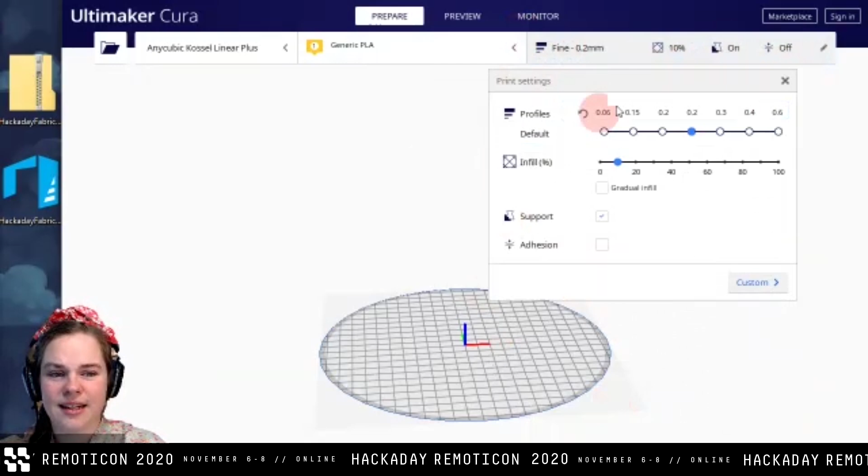In Cura, there's this wonderful search bar at the top here under print settings, which if you don't have this open, if you click on this bit where it says your layer height and the infill percentage and all that sort of stuff, it will bring up your print settings. And if it looks kind of abbreviated like this, go into custom, and that will give you the full list of all the Cura settings, so you can change anything. It's kind of overpowered, there's a lot of settings.

So I like using this search bar to find any of the settings that I need because yes, it's a very long list. So the first thing we want to change is layer height, and we want to change that to 0.2 millimeters, just so this print doesn't take too long, and also so it's nice and squishy. If we were going up to 0.3, it might start to get a little bit loose and might not squish through to the layers. So 0.2 is the goer.

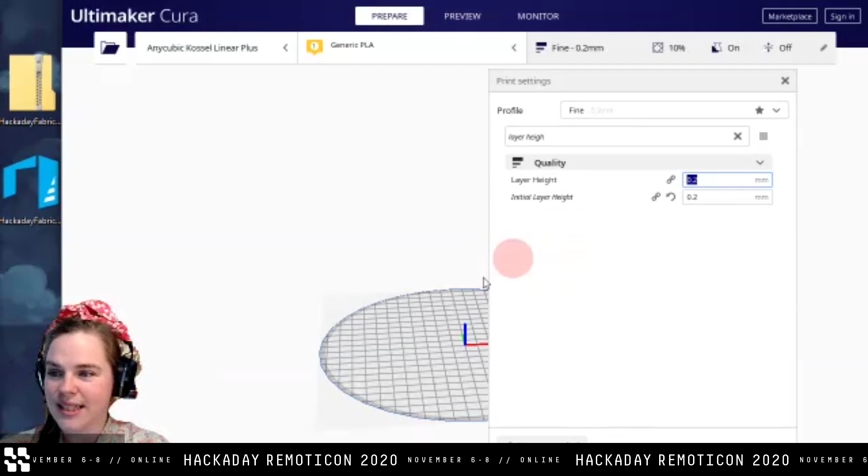Cool, Slic3r, sorry. I don't have the instructions for Slic3r, but I assume there's a way to add a pause in the slicer, so try as much as you can to follow along, we'll see how we go. Oh, you've only ever used it in Repetier, there you go. It should work with other filaments.

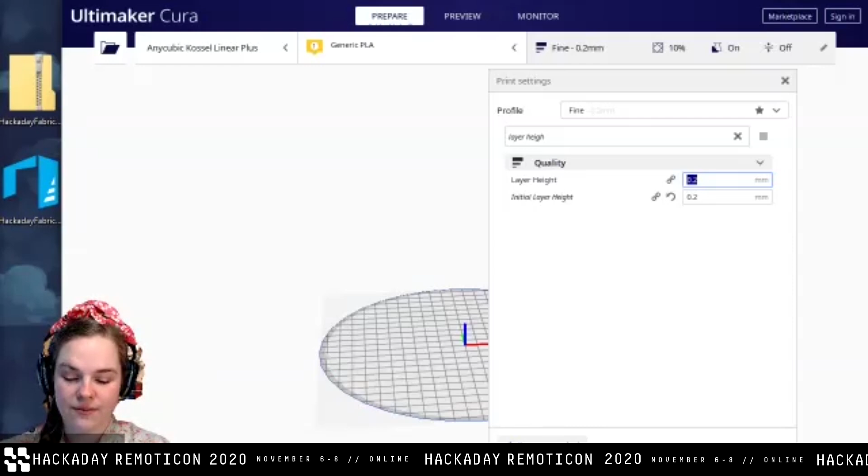I'm using PLA today because it prints at a relatively low temperature. PETG is a little higher, but you should still be fine. I think once you start getting into ABS territory, I would be a little bit worried about some of the fabrics melting on the nozzle, but please give it a go and see if it works. I just thought I'd go PLA because most people have it, it's pretty easy to print and all that jazz.

Cool, there you go. Ah, look, we're looking out for each other. Thank you for helping each other in the chat.

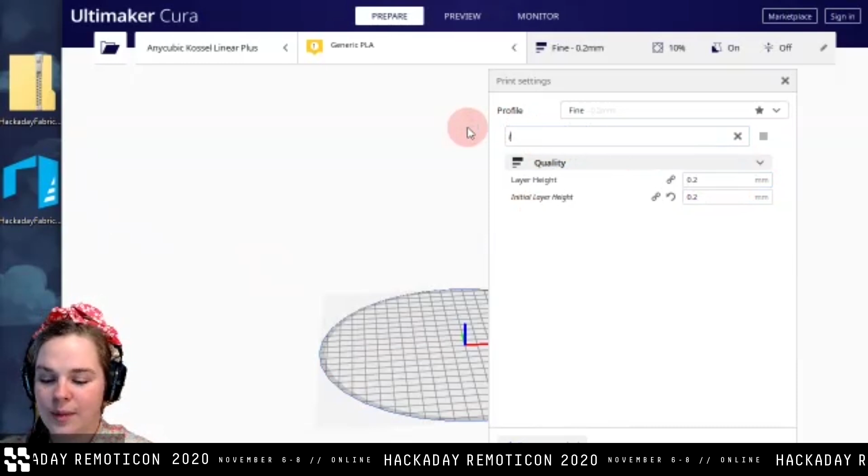So, 0.2 millimeter layers. If you type in 'bottom', there will be a setting called bottom layers, and we want to make that 5. That's purely because we are 3D printing 3 layers, then putting our fabric in, and putting 2 more layers on top, so it sandwiches the fabric in. If we left that at 3 layers, which is the default, it would just put the fabric in and it would only be held by the edges of our model, like the walls of our 3D prints, which isn't as strong as properly sandwiching it between full layers. So make it 5 - 3 layers, our fabric, then 2 more layers on top to really squish it in there.

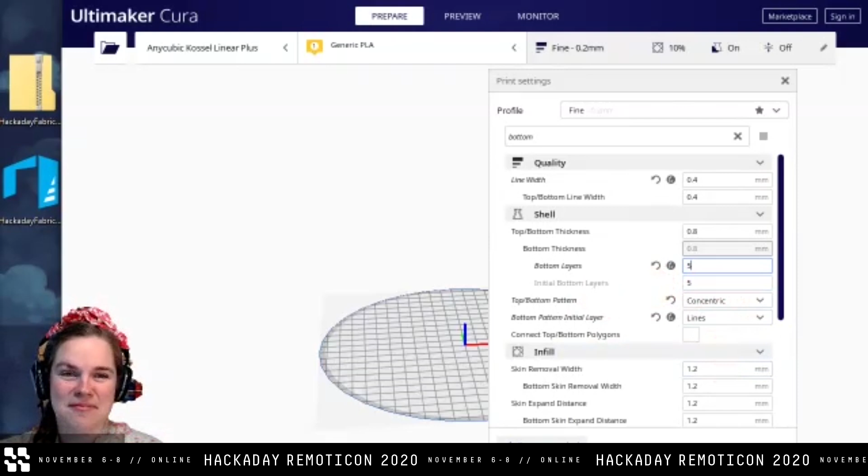So bottom layer is 5. You can print with or without bed heat, it doesn't matter too much. I've had success both ways, so it doesn't really matter in this instance.

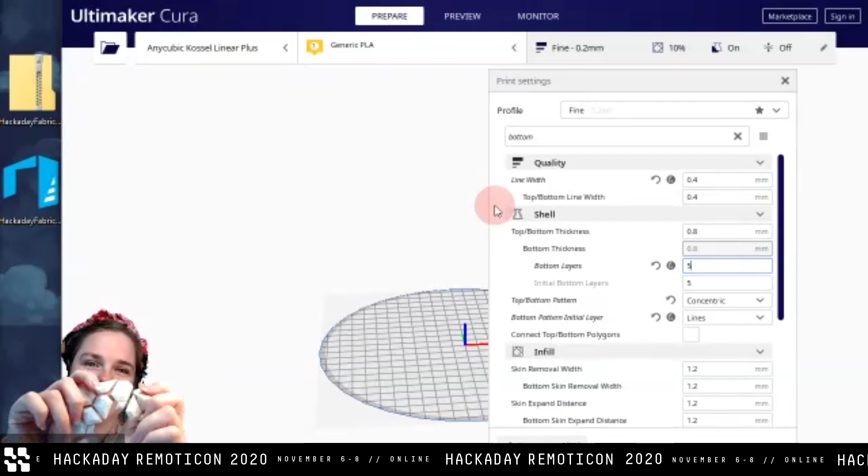One note - when printing quite small patterns like these, if you use concentric infill in the top layer, it can mar the surface. I have an example here - the nozzle moves around in tiny little circles and gets a bit scratchy right in the middle. So you might want to set it to lines or something instead of concentric if your top fill pattern is concentric. You might want to change it to lines or zigzag, just something that doesn't keep the nozzle moving in the same area for a long time.

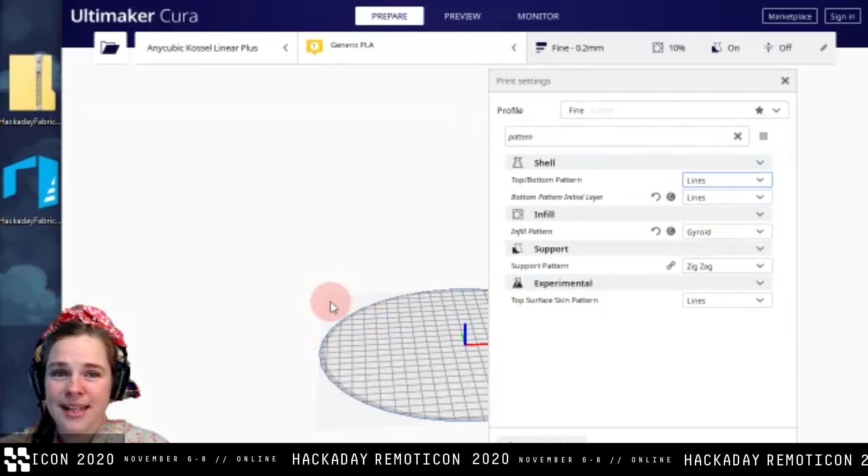How's everyone doing? Anyone got any questions so far? Looking all right? I'm getting some nods. Cool, feel free to interrupt me. I know I talk quite quickly, but feel free to interrupt and I'll keep trying to look at the chat.

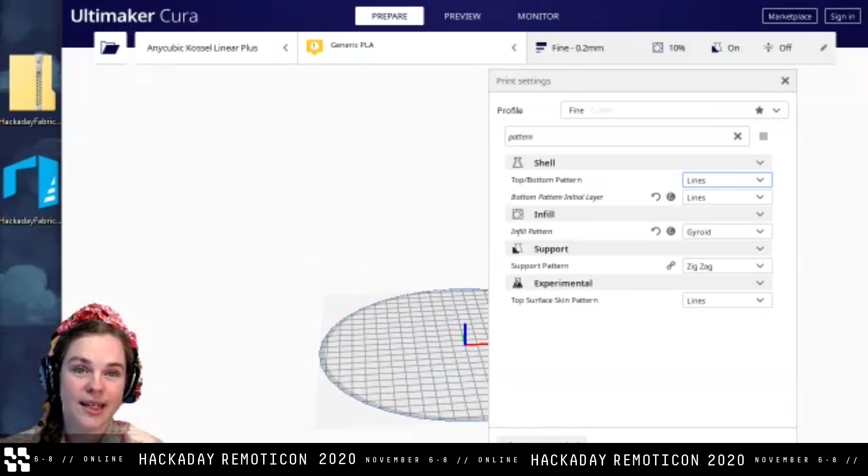So that's the bulk of the slicing done, but we want to add our pause as well. You can, if you're just doing a quickie print, hit pause on your machine manually, but we can actually pause it at a very specific time, which makes it a bit easier.

So in Cura, the way to do that - I'll jump back to my presentation - is to add a post-processing script. I have a little GIF here of it going through and ticking along. I'll demo it, and then I'll leave this GIF running so you can do the same thing.

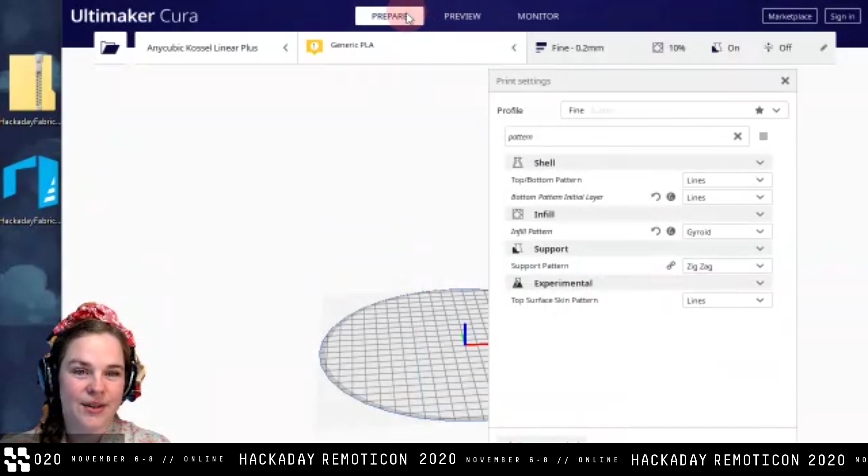I will switch back to the actual software. Here we go, so you can go into... oh my gosh, come on, prepare. Sorry, no, it's me. So go into Extensions up in the top. Oh, I'm a little bit chopped off, I'll move this down a little. There we go - Extensions, then Post Processing, then Modify G-Code.

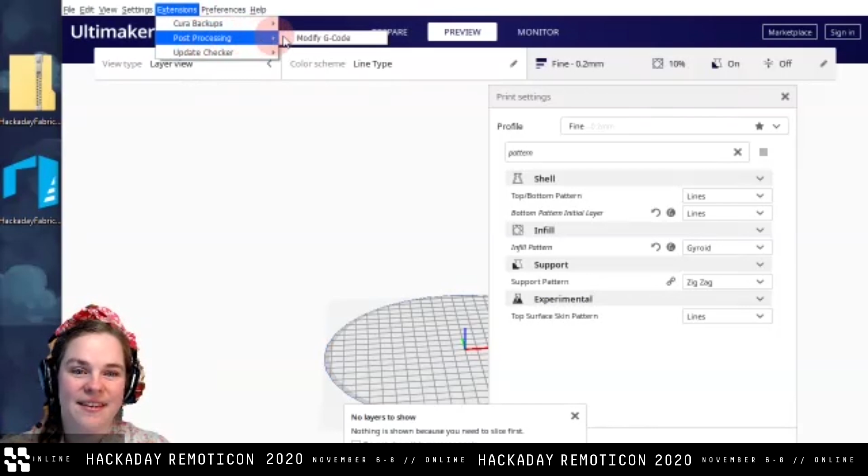You can make the initial layer height whatever you normally use. I normally make it the same as the rest of the layer heights, though sometimes people like setting it smaller so you get a bit of squish to adhere to the bed. You should be fine with whatever you use.

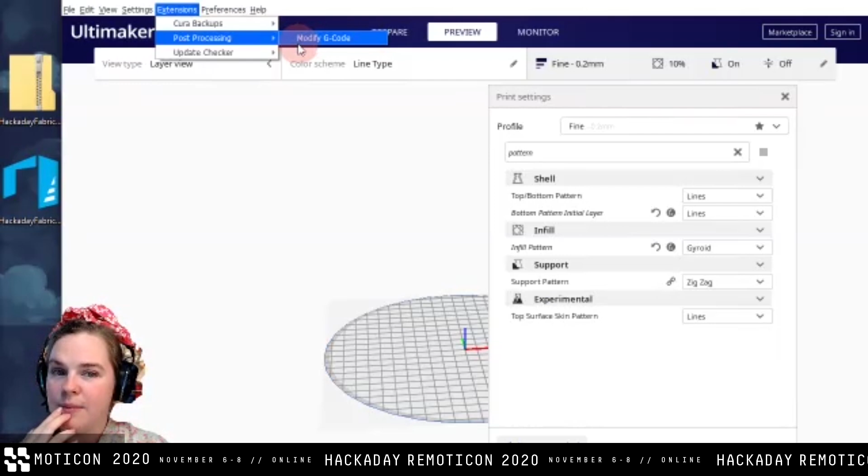So David, is that in the Modify G-Code? You don't have layers, only millimeters? Is that with the post-processing you're talking about? I'm not sure - okay, cool, we'll get back to that one.

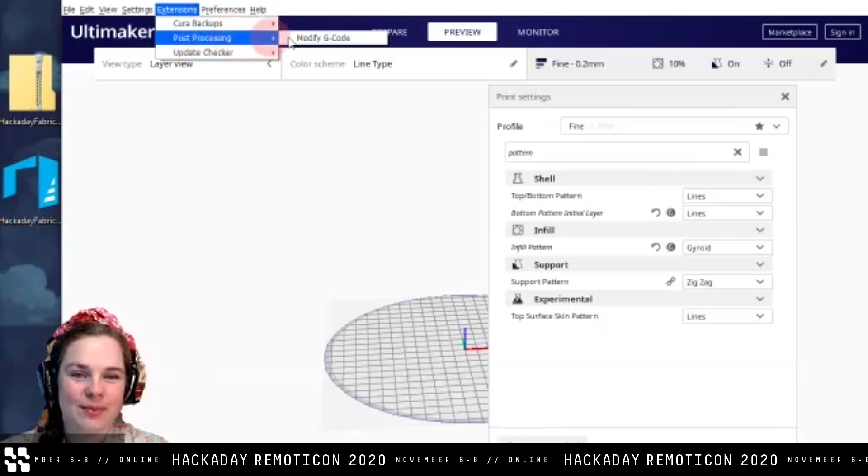So yes, we are adding the pause by going Extensions, Post Processing, Modify G-Code, and it will open up a little window like this, probably empty. You'll want to add a script and go 'pause at height'. There's a few different pause at heights depending on what firmware your machine is running. If you're running something like a Creality machine, like Ender 3, CR10, or Prusa MK3 or MK2 or any of those, you're probably running Marlin, so you'll probably want the one that just says 'pause at height'.

There are other pauses for other machines running RepRap firmware, like the Duet or others. So use the one that works for you, but probably this 'pause at height' one will be the one, because this one is for Marlin, even though it doesn't quite say that, but it is.

In this menu, you want to change a couple of things. It'll say pause at height, and the first option will be pause at, with a dropdown where we can change it to height or layer number. We want to change it to layer number because we want to pause at layer 3. So change that first dropdown from height to layer number, and then the next field below it is pause layer, and change that to 3.

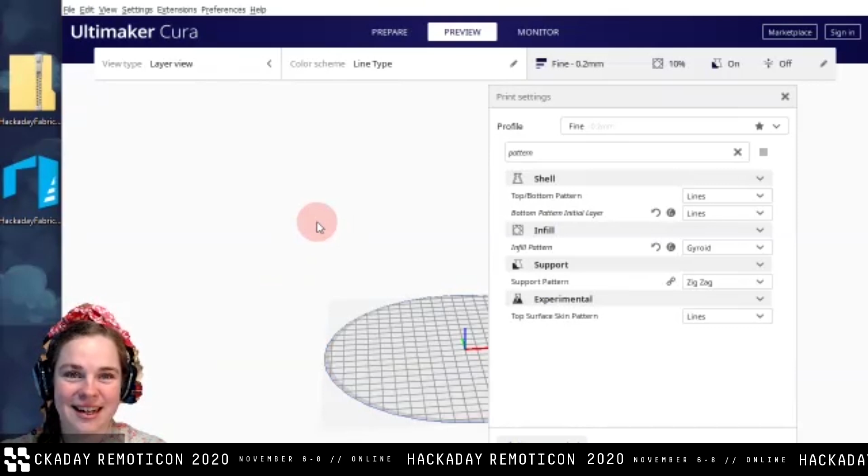Other than that, that should be fine. Once you've got that, just hit close, which does save it. There's no save button, but it's kind of saving it as it goes. Then you should be hunky-dory, able to just hit save on your G-code.

I'll just play this GIF in the background for anyone who didn't follow along, since it talks through the steps as well. In the meantime, I'm going to export this G-code. Oh, helps if I actually put the model on a bed, which I hadn't done before now. So yes, I'm going to slice it now and send it to my printer using Octoprint.

Has anyone not put the pause in? Does anyone need another go of that?

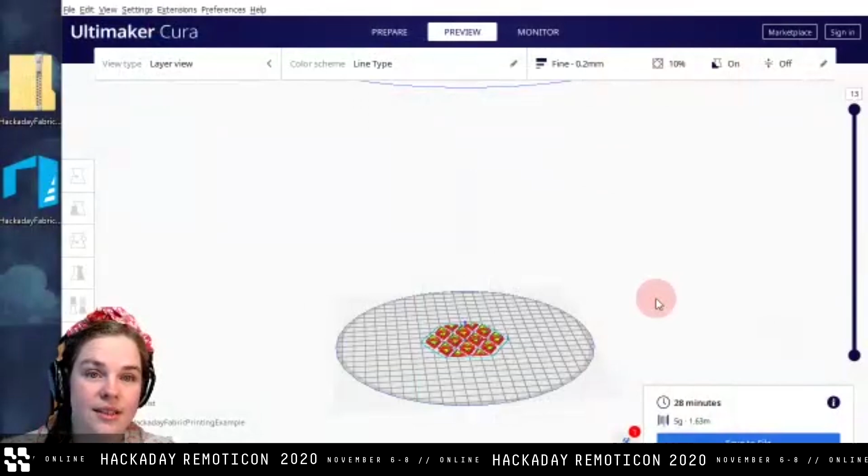The script will be active next print, so yes, you do need to remember to disable it. Thankfully in Cura now, it didn't used to do this, but now it has this little alert when you're slicing saying you've got a post-processing script on, because lots of people did what I did and forgot about it and left it on, then you just had to hit go again on your next print.

Okay, you can pause manually, that should be fine. Just try and pause at layer 3-ish or 2.5 or whatever. As long as it's around 3, it should be good.

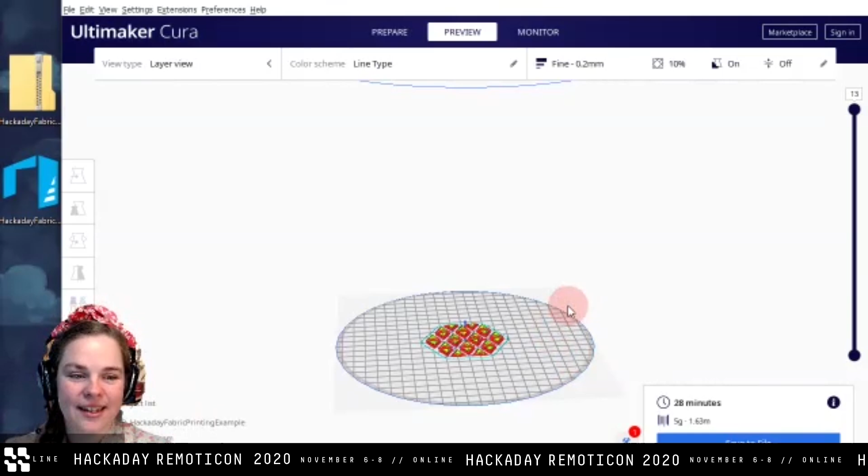Cool, yes, so you do have to remember to disable it for your next print. Don't do this now, but when you don't want to print on fabric, just jump back into settings, extensions, post-processing, modify G-code, and hit that little X button to remove it. But don't do that now, do that when you want to print something not on fabric. But yeah, you will have to disable it again.

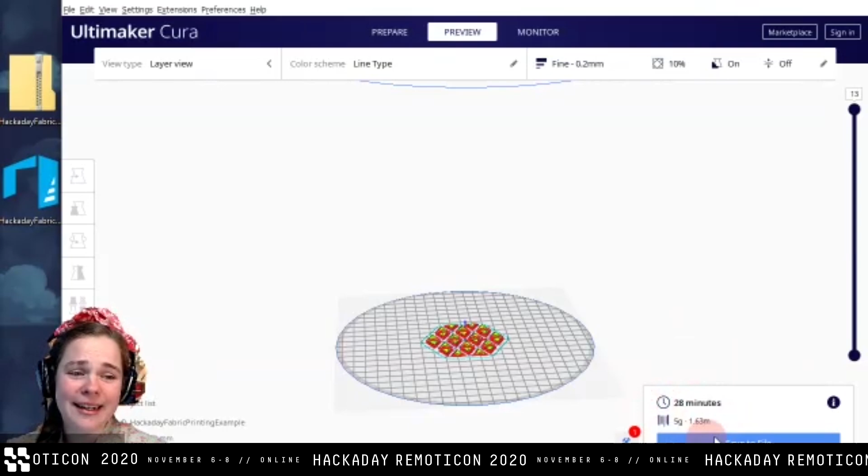Cool, so hopefully your print time will be somewhere around half an hour. If it's not, maybe just speed up your print for the sake of this. It might not look super pretty, but hopefully it will finish by the end of our session. I do really want to give you a chance to be able to take it off the bed and everything.

So yeah, save it to file, and we will pop it in through Octoprint for me. I've got it up here. If you haven't used Octoprint before, really cool software, it allows you to print remotely using your 3D printer, which is very, very fun.

Alrighty, I'm going to hit print on that. It's a little bit noisy, my machine. I've tried to find a quieter place for it, but there's nowhere in the house because I share my house with people, so a little bit tricky.

So we're just going to have to deal with the noise today. The nozzle does cool down during the pause, but it should heat back up again before it starts printing again. Yes, Octoprint, amazing.

Gina is a legend. Sorry, I'm just reading the comments.

Don't put the fabric down yet. We're going to print to layer 3, that's what our pause was all about, that's why we inserted that pause. So we're going to print 3 layers, then the machine's going to pause for us. Then we're going to put our fabric in and tape it all down, and then we're going to continue our print.

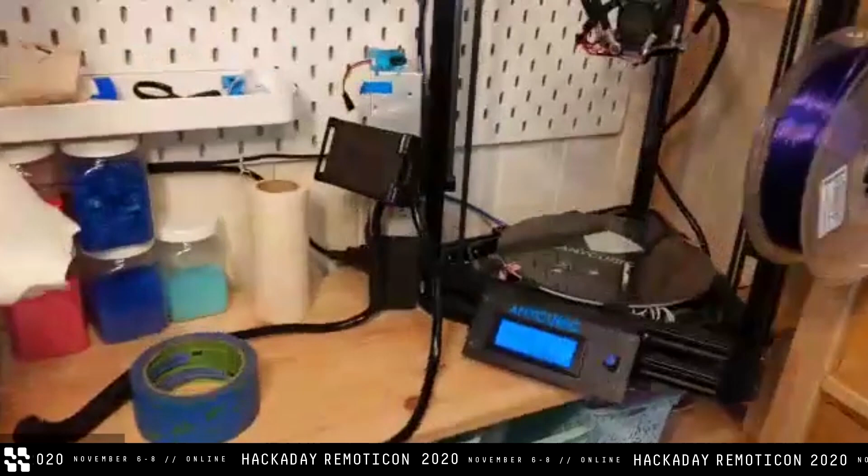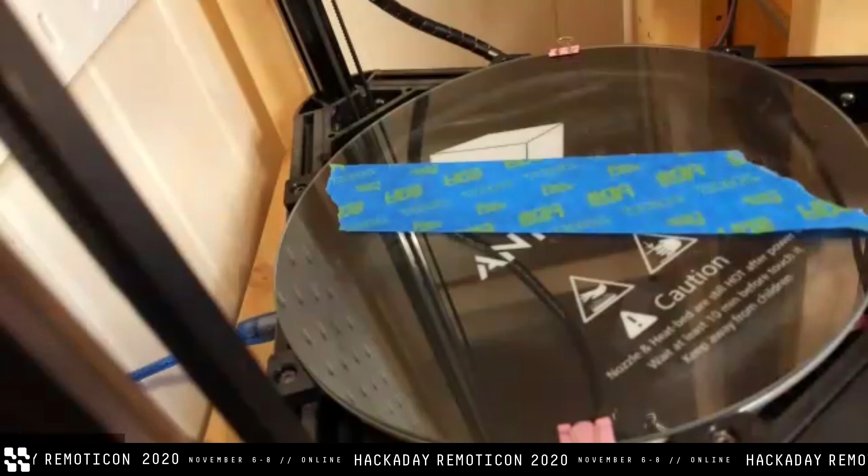I'm just going to pop you over here at my printer. And this is my bed. I'm going to be putting down a bit of paper tape. Sorry about that, I meant to say it sooner. But yes, a little bit of paper tape to print on top of. It just helps remove the print so that we have something we can pull the print up from. You just want to try and line them up with each other pretty closely.

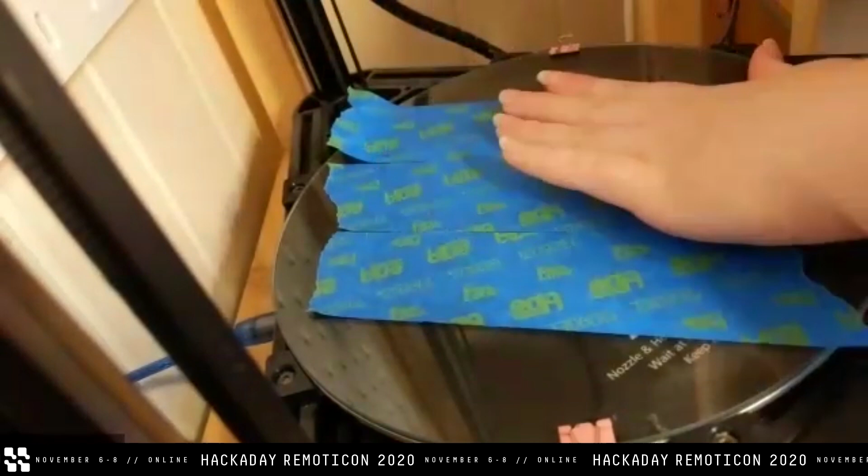Cool, so we are just warming up. And I'll put in my little leveling doodad, because if you're putting paper down, you'll also want to re-level because otherwise it might be a bit squished. You might be all right, but I'm going to level just to be safe.

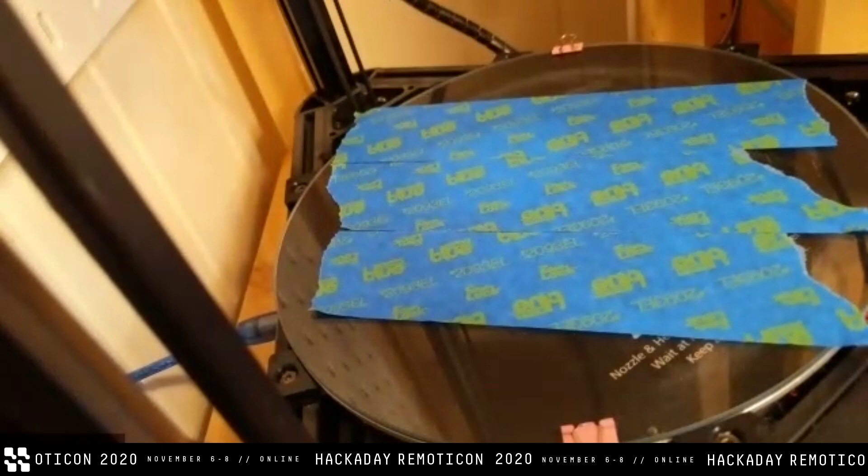And it's going to do that. It'll be a little bit noisy. It's particularly noisy when it levels. It's not quite as noisy when it's printing. But I'll step away a little because it's kind of noisy.

28 minutes to print. Good. That's what we want, David.

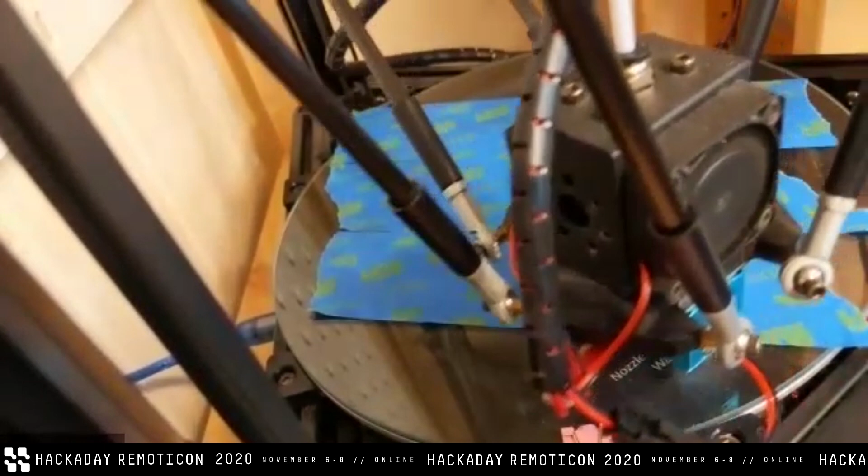Yeah, this is my little craft room. It's my happy place, I think I can. Yeah, this is my room. So that's my printer that we're printing on right now, and this is where I'm sitting normally. Got my window.

It doesn't have to be unheated, but you can make it unheated. I used to print it unheated all the time, but the paper tape is really just to make it easier to remove. So we'll be lifting the paper tape and hopefully the print will come off with the tape. It just makes it easier so we're not jamming a paint scraper in under there because that might tear the fabric as we're poking it.

Cool, flick back to this camera. This will be done pretty soon.

Oh yes, that's my new painting. Thank you, Jeff. I just started learning to paint, it's very fun. Where are we? There. Yes, it's very fun, I'm enjoying it.

So after it levels, I'm going to get it to start printing. Oh, it's nearly done. All right, flick back.

Oh dear, my mic is tangled. Sorry, everyone. Yes, cool, got you back. Hello.

So I'll take this off, take off the leveling, and we will hit go. And it's going to start printing. Hopefully it'll just print hunky-dory. Yeah, she's going for it.

I also had a question about thicker fabrics and how to handle them. So thicker fabrics, I haven't done too much work with thicker fabrics, but I know some other people have, and they've had quite a lot of success. Sometimes you have to turn up the heat a bit more, purely because the fabric sort of acts as an insulator. So sometimes you have to crank the heat up 10 degrees or more on your bed, and then you can get into the thicker fabrics. If they're really thick, they have a bit of a hard time sandwiching between the layers above and below. So what you can do is cut little holes in the fabric so that the layers of plastic above and below have something to adhere to. That's a way to do it with polar fleece and stuff along those lines, cutting little holes where the plastic can join together as it's sandwiching. You don't need a laser cutter, but a laser cutter is always awesome, so if this is the reason you're buying a laser cutter, go for it.

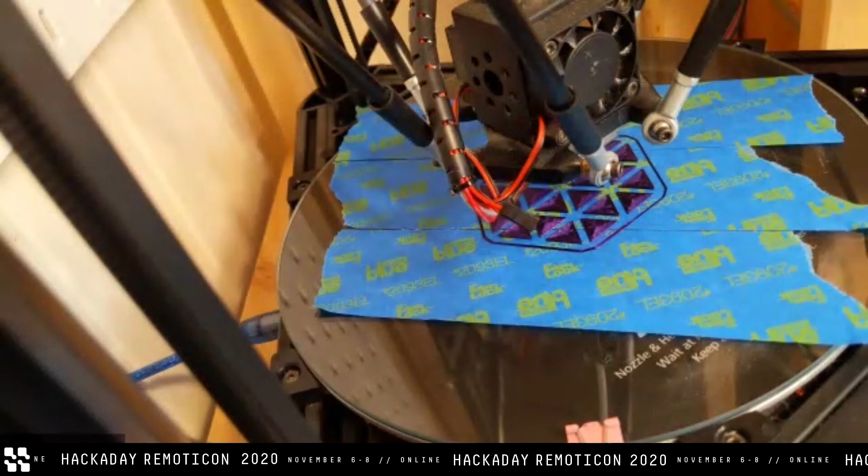So this is the kind of fabric roll that I have. It's a bit squishy in the screen, but I'm trying to get it in shot. Yeah, so it's very, very lightweight tulle. You might even, yeah, you'll hardly be able to see it, but that's kind of what we want. We want it to be nice and gappy.

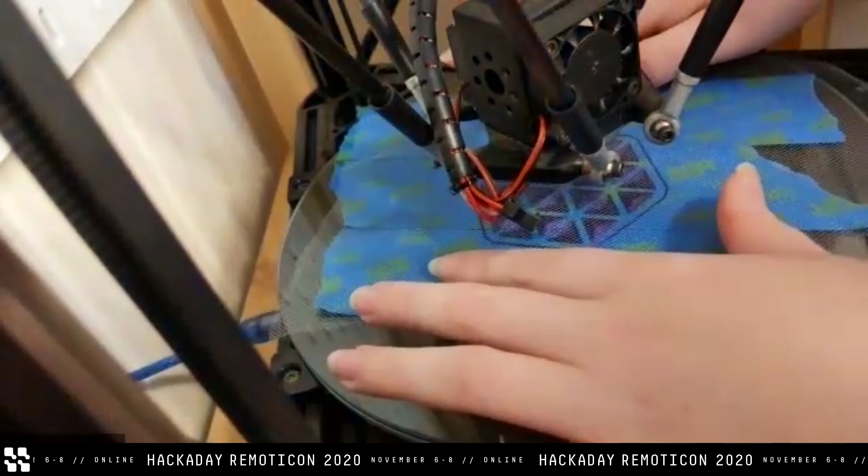So just cut a little bit off that is big enough to cover the 3D print that's there so far. If you have any drooly bits coming out of your nozzle, get rid of those because they'll get in your way. And you want to pop your fabric in, and you just want to make sure you don't hit the nozzle with your fabric because the nozzle may still be quite warm. And if you hit it with the fabric, it might just melt the fabric, which would be a shame.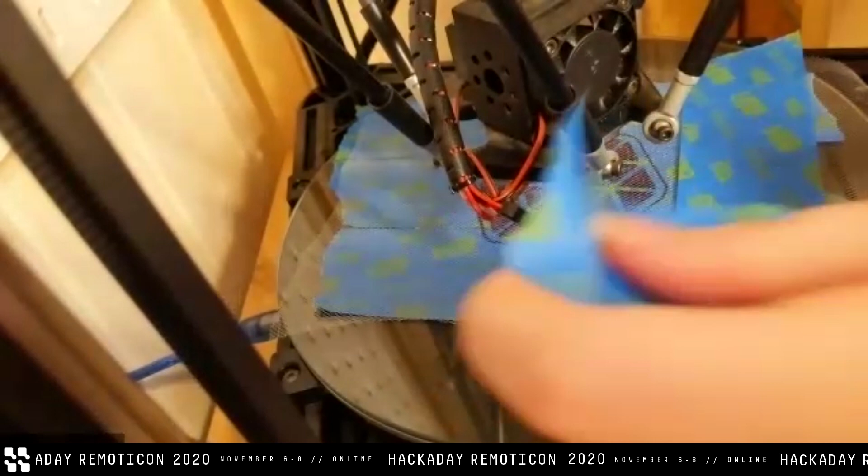So then just grab your tape again and just tape around the edges and just make sure it's not buckling or puffing up anywhere. If it is, just take the tape off and give it another go. And yeah, the best way I've found to do it is to just lay the tape down gently and then stick it down. So lay it onto the fabric first and then stick it down onto the bed. But it's relatively forgiving, if there's a couple of buckles it should be all right. But you want to get it as flat as you can. Make it easy for the printer. And just tape it all up around.

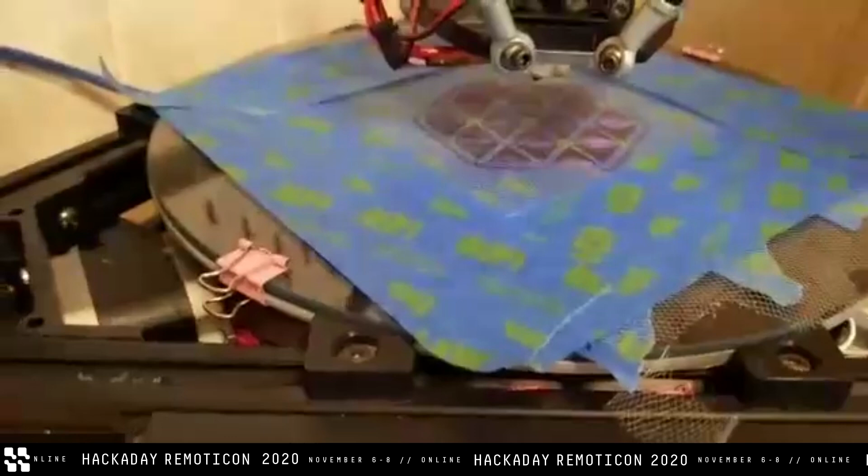I'm just going to do 4 bits. You can reuse the tape too, I've used it for multiple prints before. Just stick it to something nearby and reuse it again. And so it should look something like that. I will move the camera around a little. So something like that, nice and flat, tape all around it. Yeah, give that a go.

Yeah, the tape glue will stick a bit through the mesh. You can also try and bring the tape outside of the mesh if it's a thicker fabric, just make the fabric a bit smaller so that the tape can cover a bit of the fabric and a bit of your bed.

How's everyone doing? It's making a kind of sense. Am I going too quick for anyone?

Without printing on really thick fabrics, could you skip the glazed layer? Yeah, I think you can, but you'd have to do a bit of post-processing of the G-code. You'd probably have to remove a layer and change modes, because there's 2 different modes of G-code: absolute and relative. Relative is basically coordinates chained to each other, while absolute is a specific point in space each time. You'd probably want to use the specific point in space mode, then remove a layer. I don't want to give you a strict answer and say it'll definitely work, but there would be a way to make it work for sure. Check out the Marlin G-code library - that'll help you read the G-code and work out what you need to do.

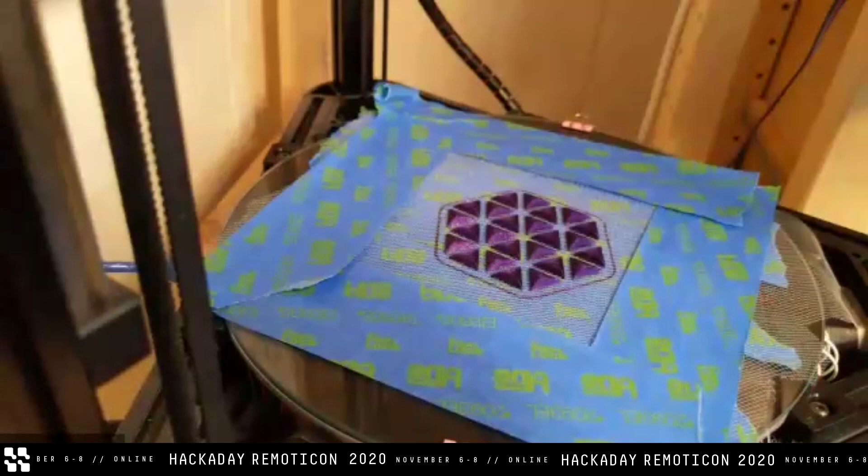Okay, cool, I'm gonna jump over to the printer because we're getting close to the end - not too close, but close enough. So I will show you how to take it off.

Oh, if you've got a Y shift, you may have bumped the nozzle potentially.

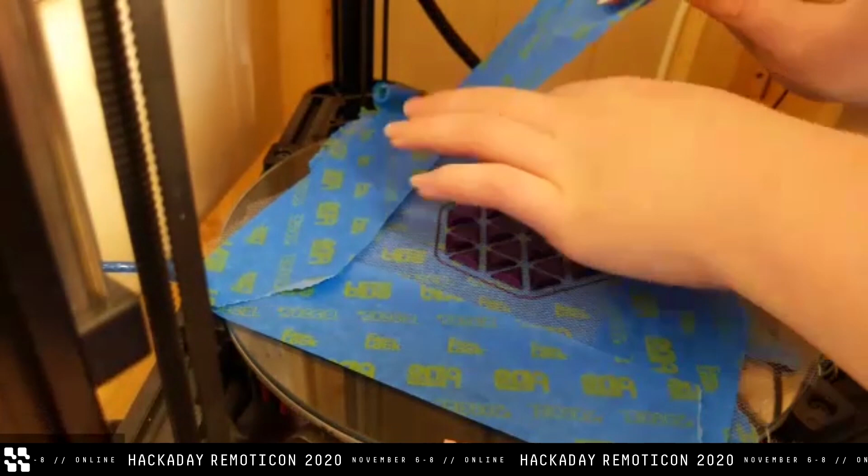Yes, that is one thing to watch when you're putting the fabric in, is don't bump the nozzle. Yeah, or the bed. Bumping something will make it a little bit out of alignment. Some printers will allow you to home it mid-print and it will go back to where it was, but mine doesn't, so I just try not to bump anything. It's a little easier with a Delta, thankfully. It's quite hard to bump, you don't have the bed to bump as well as the nozzle, you only have the nozzle. And this one's a pretty firm nozzle, thankfully.

So yeah, just peel all the tape up first, and as you're going, be careful that you're not pulling up the tulle as it goes, because that might tear the tulle. Again, the tulle's sort of the most delicate of the fabrics.

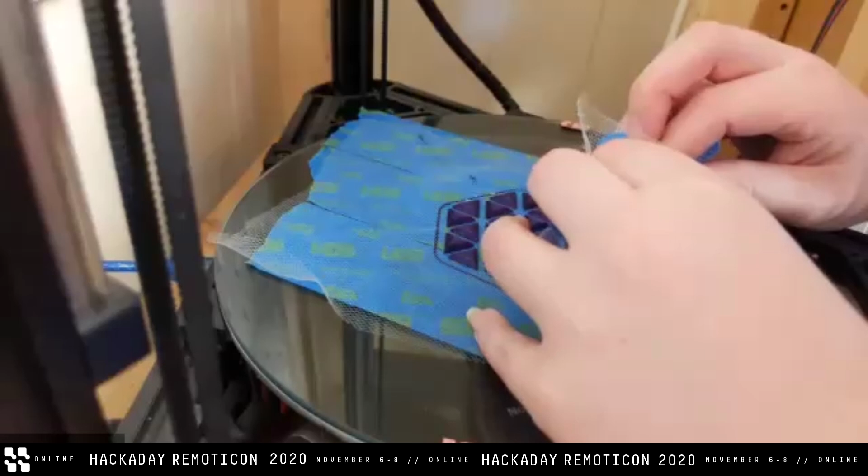So now, once you've got the top layer of tape off, start peeling these up, but just start peeling all of them up. Don't peel it all the way to your print yet, because you want to kind of try and peel them up in unison with each other. Sounds a little tricky, but you just want to make sure you're pulling them up at relatively the same time, because otherwise it might pull one side more than the other.

But yeah, you'll see it's just slowly, hope I'm getting that on camera. Yeah, I am. It's like slowly lifting up, and the tape is making it easier to kind of lift these pieces up. I don't have to get a knife or my fingernails in there and start pulling them off. So yeah, pull them all the way off, and then the tape should pretty easily just pull off the back.

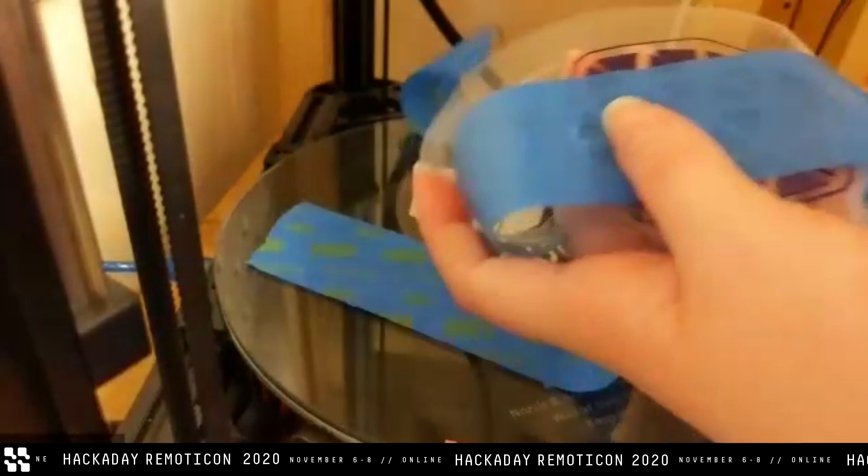Well, maybe not that end. It looks like it's torn a little. From this end, if it tears on one, try the other end and you'll probably be fine. But yeah, then you have your print.

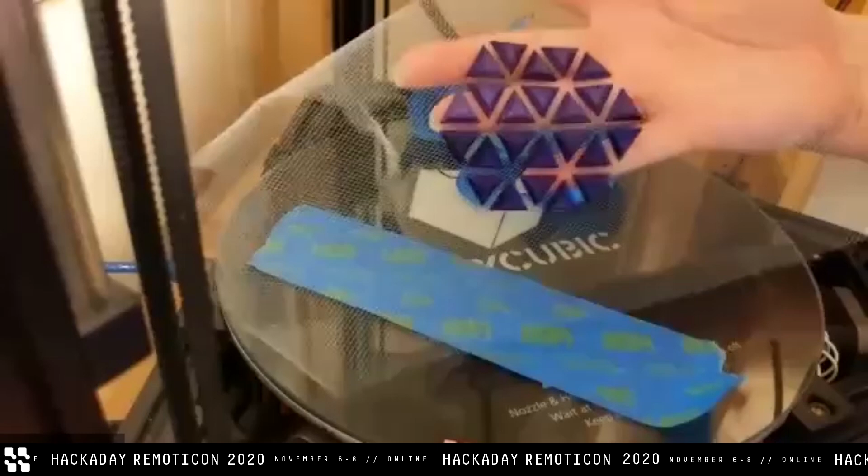And I'll take this camera over to the desk, and I'll just talk about trimming it off. Got all my little things. Get these out of the way. So I'll just...

Here we can just check in the chat what printer I'm using. I've got a little Anycubic Kossel Linear Plus. It's a little Delta, which I quite like, but I don't think they sell them anymore.

Wish I had a rig or something to stretch the fabric. You could try an embroidery hoop and stretch it on that first and then place it down, or just cut the fabric a little bit closer to the edge of your print. So just cut it a sort of circle shape, and then when you're placing the tape, place it so that the tape is partially covering the edge of the fabric, but also covering the bed, and that might hold it down flatter. Does that make sense, Anna? Am I explaining that well? I'm not quite sure. But yeah, like if you were to cut the fabric off a little bit before you place it on the bed, then the tape would touch directly to the bed and to the fabric. So it might hold it just a wee bit flatter.

Yeah, cool, good, good. And not all masking tapes are equal. That blue tape is really high quality. That is true.

Yes, so once you have your print, if you want to, you can cut around it. That's what I did for this necklace. I just went along with a little sharp pair of scissors and just literally trimmed around the edges. Probably you want some fabric-y type scissors because it'll make it a little bit easier, though tulle is quite delicate, so kind of anything could probably cut it. You could probably even, if you really wanted to try, do it with an X-Acto knife or something.

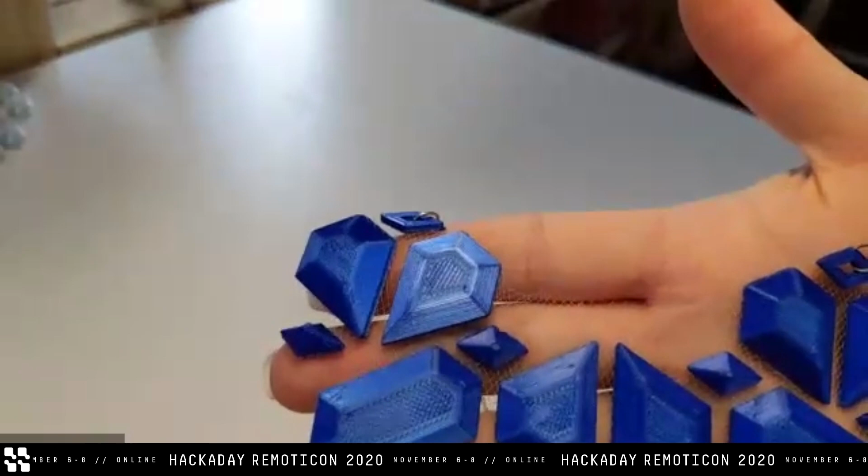One thing I do want to talk about though is that sometimes you want to leave a bit of extra fabric. Gonna hope that this shows up. So there's actually a bit of fabric across here. It's very hard to see. Maybe if I put it on against something black. Ooh, ooh.

Oh no, I've lost you all. What did I hit? Okay, hit like F11 or something. Sorry, everyone. Can you still see me? Yes, we're good. I just couldn't see you.

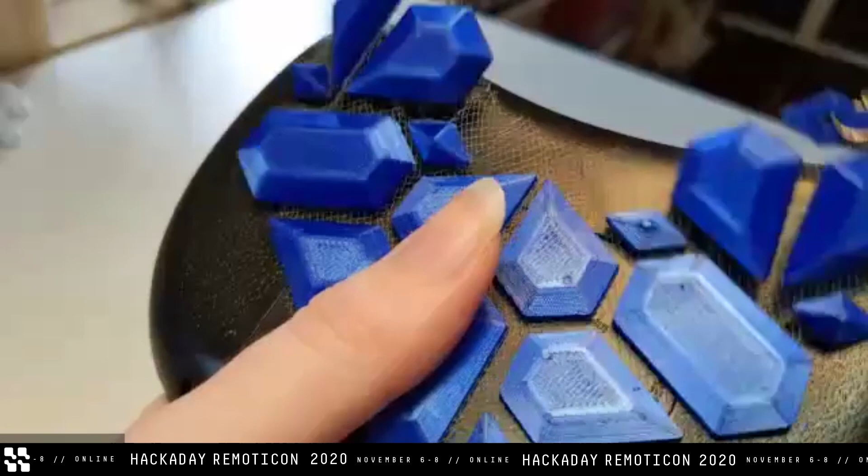I'm showing this because it's on a bit of black so we can see the fabric better. There's actually a bit of fabric here that I left purely to hold all these pieces together, like a bridge between two pieces. If I didn't, these bits would flop down and this part would collapse in on itself. So depending on your shapes, you might benefit from leaving a tiny bit more fabric around. It also stops it from tearing a bit more if you leave a little extra around the edges.

And of course, if you intend on sewing it onto something, you'll likely want to leave a seam allowance.

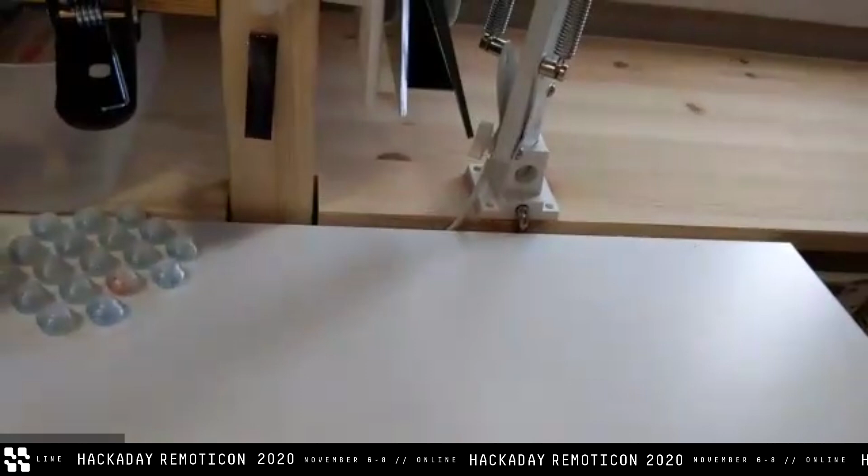I don't know how to get back to my screen, but that's okay. Is this gonna work? No, escape. I've never seen what my computer's doing before. I'm so sorry. Unfortunately we can talk to you, but that doesn't lead you through the forest back to the window. I'm going to... okay, oh, I got it back. I worked it out. I must have hit some shortcut, not sure what it was, but we're back. It's fine. Live demos.

So how are we all feeling about that? Is that good? Getting what you want? Feel like you could take it away and give it another go on your own? If not, I have resources.

If a segment falls off, how do you recommend you fix it? Do you particularly like glue? On these tulle kind of prints, they're very unlikely to fall off because they're sandwiched in there quite tight. On some of the other fabrics, like the thicker stuff we were talking about, if you weren't cutting holes in it, it might fall off. Still kind of unlikely, but if it did, probably some sort of fabric glue. Glue is kind of hard on fabric, it never works fabulously well, but fabric glue would probably be your best bet.

If your printer allows for it, you might be able to make a frame similar to what's used with a vacuum forming screen. So like an embroidery hoop might work - you can sometimes get square ones of those. A little frame you could stretch something over and even just clip it to it would probably work quite well.

I'm using Scotch Blue tape, it's just a special one that has an edge lock. You don't need it, it was just the one they had at the store. Any Scotch Blue tape should work - it's a good one.